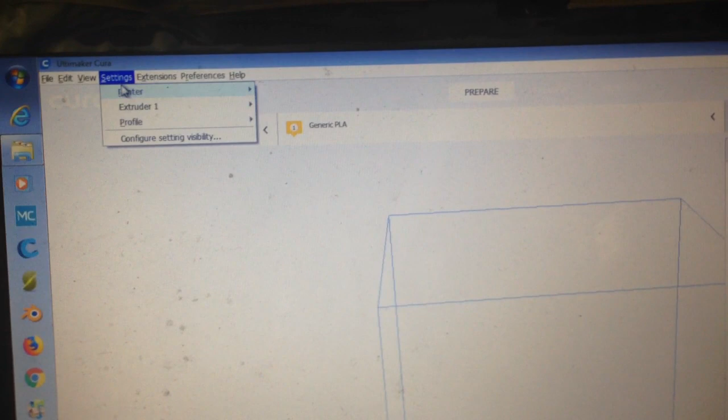So let's see what we need to do here. We'll go into Settings and Printer, and select Tevo Michaelangelo. But if you don't have a profile set up, which you do, but it had the old nozzle on it, what you need to do is just click on whatever version you have. I'm going to pretend this is the version, and fingers crossed that it doesn't crash.

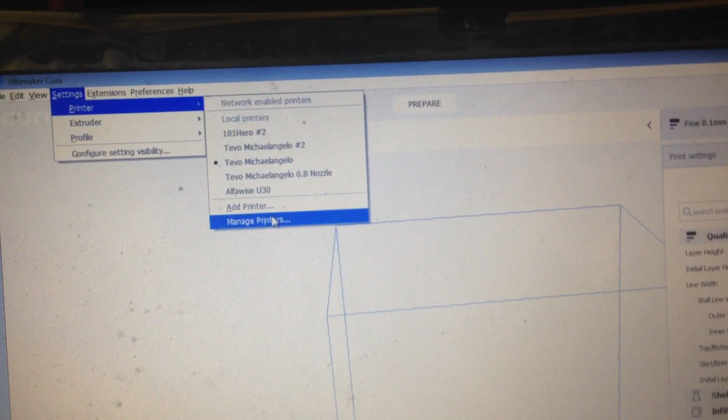It did not open anything. Alright, great. Printer. Oh, let's go into Manage Printers. Okay, so let's manage printers and then machine settings.

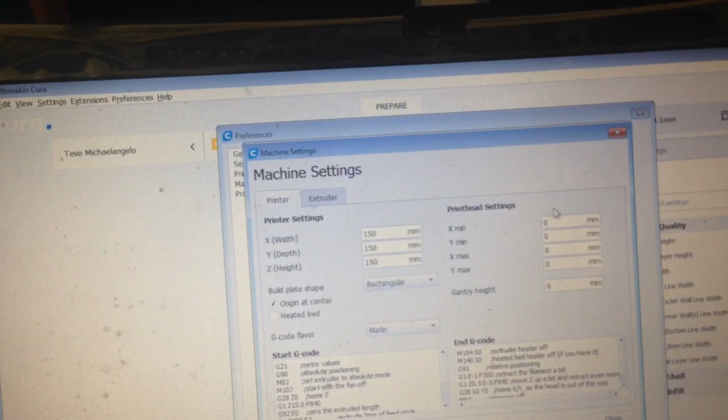And here we go. So we'll have these values. Hopefully they're all set up correctly. Rectangular, Marlin, you don't need any of this, unless there's some specific issue that you're having with the X, Y, and Z, but in our case it's perfectly fine. You don't need to mess with any of this code. It's what comes with the machine for now, so don't worry about that.

But you will have to change this value to 0.8 now, because there is a 0.8 nozzle on it. This will stay the same. If it's 2.85, it's wrong. It needs to be 1.75. And that's pretty much all you need to do there.

And then, of course, you will have to change the settings here. I like to go fine on here, or if you want it to be a little bit more coarse, you can put 0.2 or 0.3. I usually use 0% infill because it saves on plastic, but if you want to make a stronger part, you will increase this value. Most people use 20%. You can go all the way up to 100 if you want a very strong part.

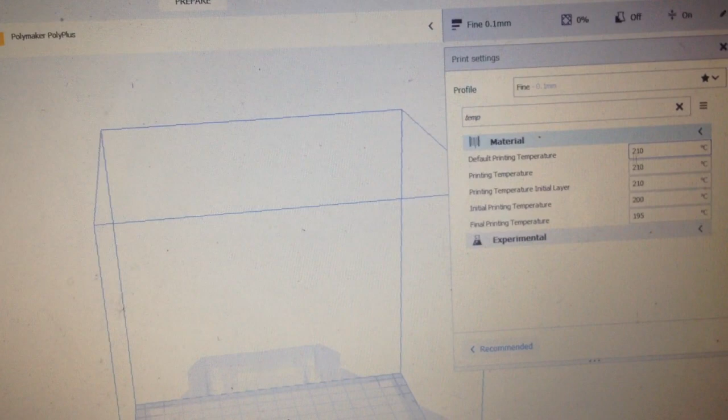And here is, because I've tried going through here and it's hard to find stuff, but luckily they have a good search engine, so you'll just type in temp, T-E-M-P, and if your computer doesn't crash, it'll find it, which is nice. And then you can adjust the temperature for the Tevo Michaelangelo, which usually requires a little bit hotter in our particular case.

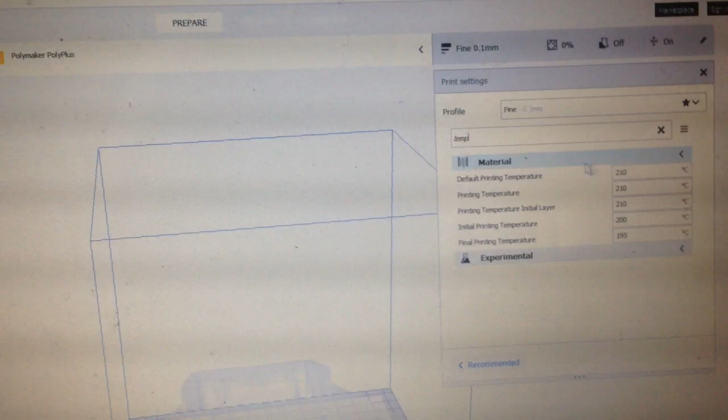I usually like to print at 210, 215, or 220. Luckily, you can also adjust this from the machine itself, especially if you're using Micro Center filaments. A lot of those require a little bit higher than 200 as a temperature, so that's good to know, and it will save you some trouble.

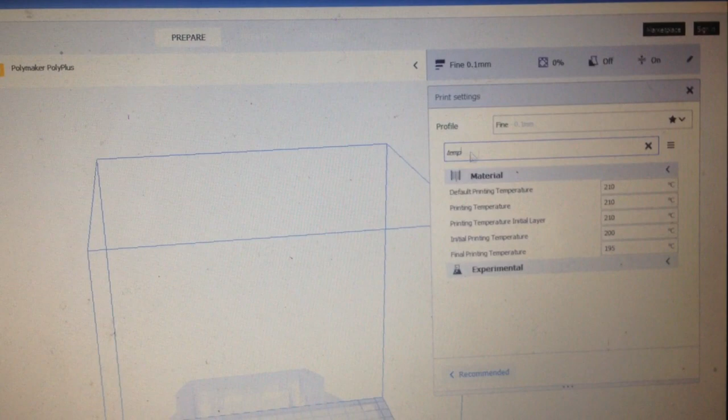As far as setting up different speeds and all that, I haven't worked it out yet. It was very easy in the old version. Maybe we could just try typing in speed in there. I don't know, it's a good try. But the old version was very simple, it had all the values out there in the open, all on one page, so you could just adjust them, but I guess this one does not.

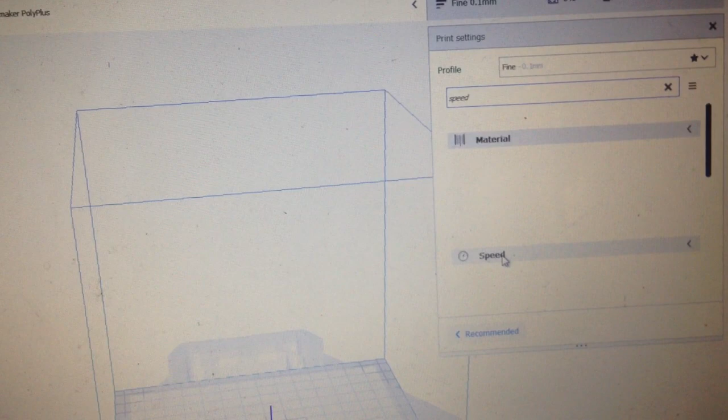Hopefully it's in here. It's taking a very long time to load on my computer. It says fan speed, so I guess you could change some of these values, but I wouldn't really mess with those. Retraction, you probably want to change this value to a lot faster so that you don't get stringing.

Nozzle speed 20. I guess this is pretty standard, so it should work the way it is.

Even though it's hard to find stuff on here, at least they made a really good search engine, so you can just type things in if you know what you're looking for, and you can make adjustments that way.

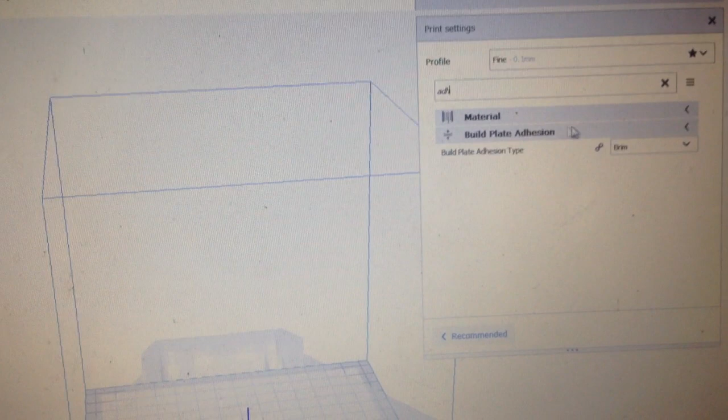Usually you can put a brim, but I usually set it as none because the Tevo doesn't really require adhesion if you set up the leveling correctly.

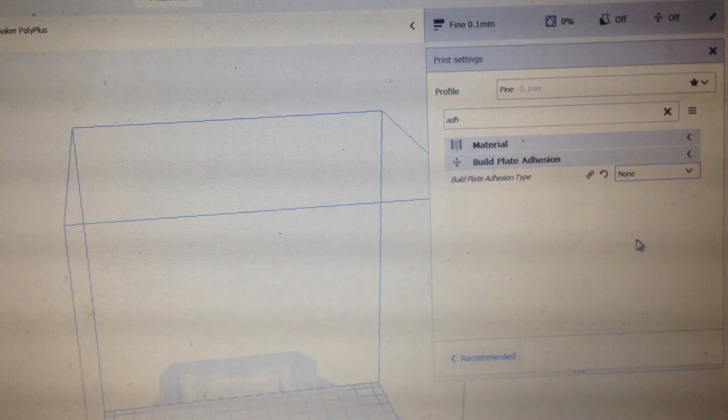Most people don't, which is why they rant about it online that it doesn't adhere to the build plate, but that is not true. And the other reason people rant is because they say the printhead knocks things off the build plate.

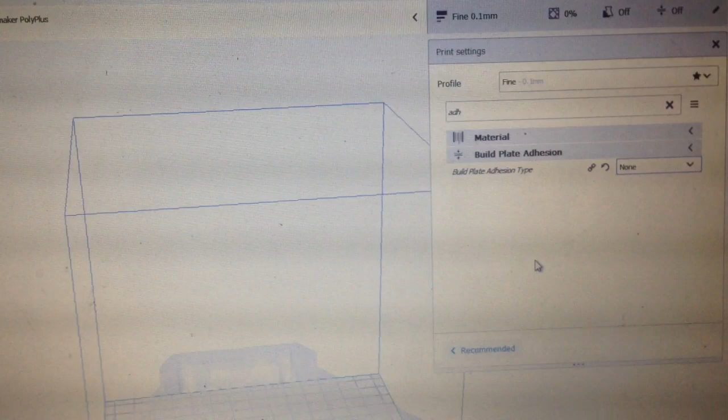That's only true if you don't crank all the jerk settings down to 0. If you don't do that, it makes the printer jerk, and it will knock things off the build plate. Or if you're crazy and try to print super fast, that'll happen on any printer.

So yeah, I think that's everything, and for once it hasn't crashed, so that's beautiful.

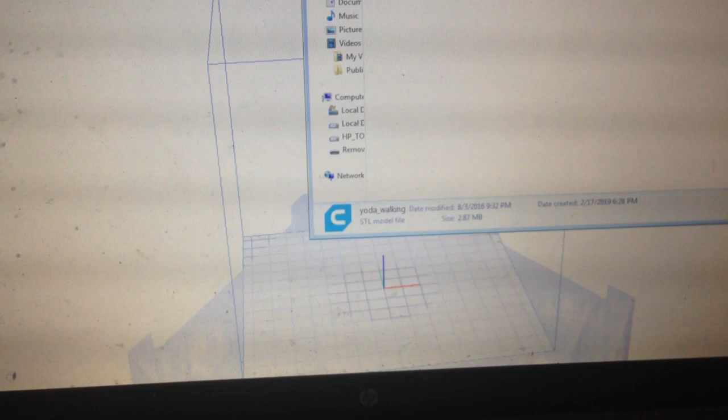Let's see if we can do one last thing, which is show you how to import a model. I usually just drag and drop it, or you can open it up here from File, or from here, either way. You can open a model from there by pressing this button.

I won't do it, this button here—I won't do it just because it may crash my computer, and that's not fun.

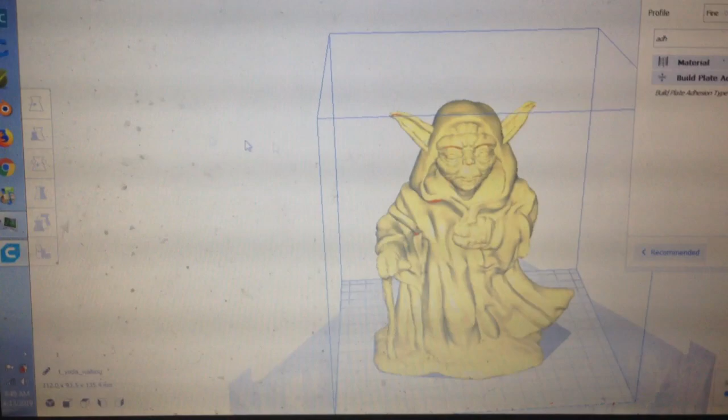I will press on Yoda real quick, and then we'll go here to these settings. These are for moving your model.

If you want, you can just add values in there, or use these lines. You can click and drag on these to move it up, left and right.

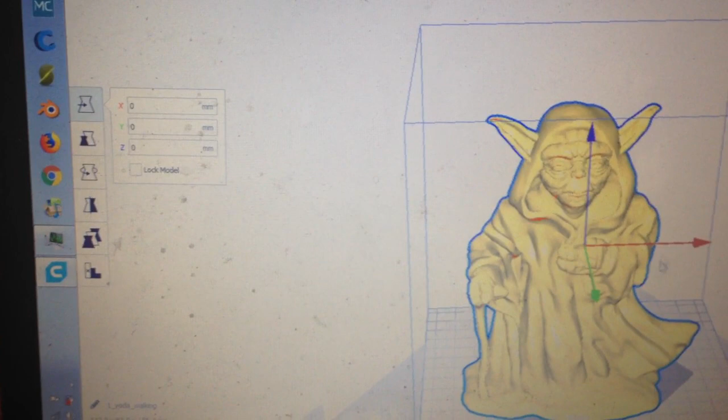I usually wouldn't mess with it, especially if it's one piece like this, because it's already in the center of the build plate and it will print just fine.

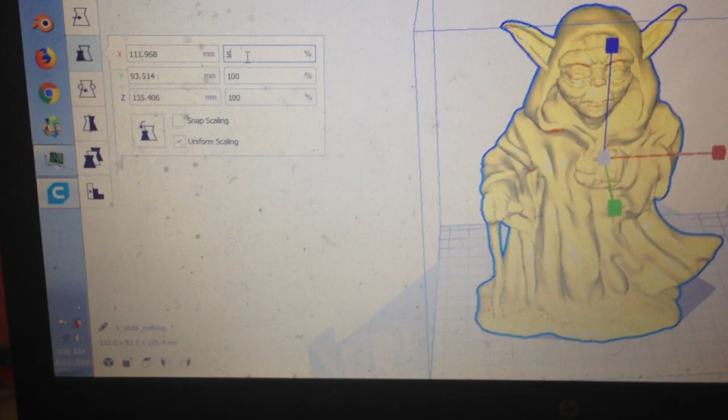Over here you have this little icon, which allows you to shrink or enlarge your prints. So let's say if you want to do 50%, you click that button and it'll shrink it down and put it down on the build plate so it doesn't print in the air.

It does that automatically. Make sure you have this checked, or it will only change one value at a time. So with this checked, it will change all 3 of these values, which is what you want, unless you don't.

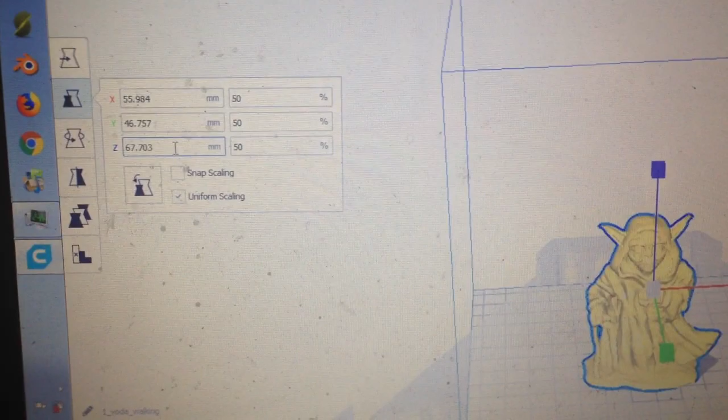Let's go to the next one, which is you can rotate the model using this. This will mirror the model. You don't need that for most models.

But these 3 are more advanced, so you don't want to mess with that when you're a beginner. And yeah, I think that's all.

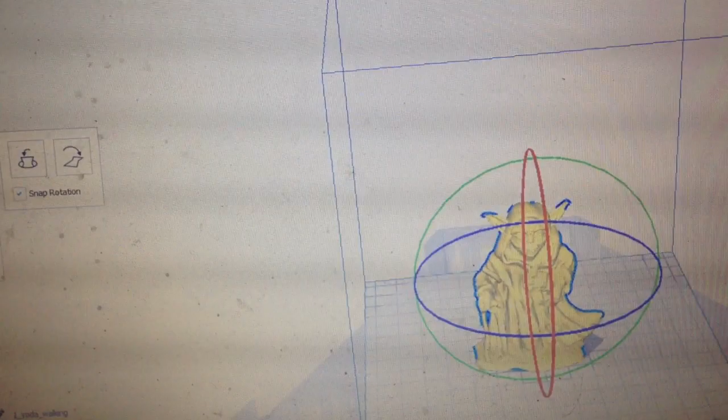The last thing is you want to be able to save your files to your removable keycard, whatever it is. And this is nice that it auto ejects it.

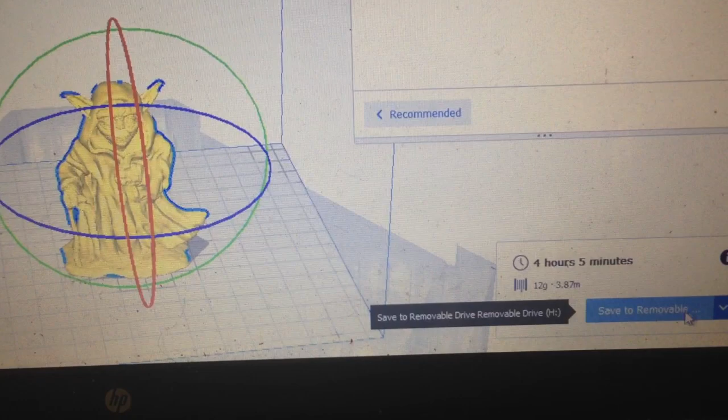So let's say you wanted to print this, you would just click on here, and then if you have that in your removable thingy, it'll even tell you that it will eject it so that it doesn't corrupt your keycard.

That's a good feature that the old version did not have, which I'm happy they put in.